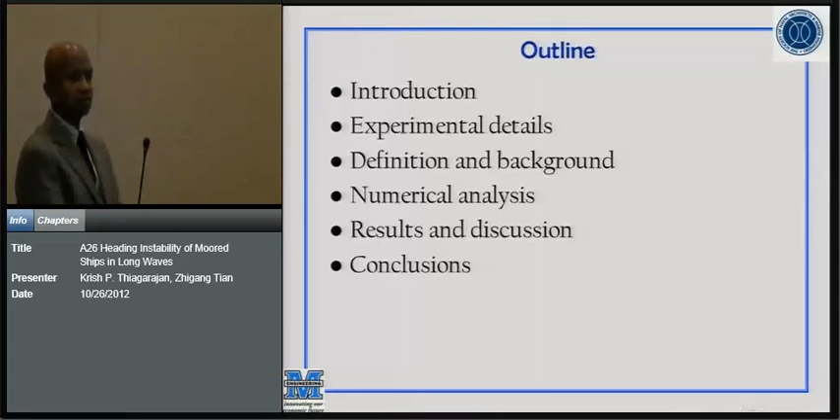To give you a background, in the offshore oil and gas industry, a lot of moored tankers are used for oil production because of their ability to store oil. They are used quite prolifically in remote fields such as offshore Australia and in West Africa. There are a number of regions where such moored tankers are the preferred production choice.

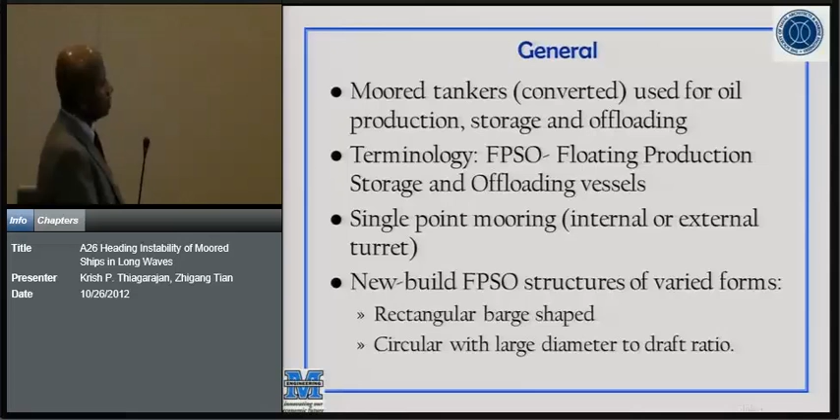To give you an idea of how these external and internal turrets look, what you see are two FPSOs. This is the Laminaria FPSO, offshore Western Australia, and the Kikeh is offshore Malaysia. The Kikeh FPSO has an external turret here, and the Laminaria has this internal turret here. The lower part of the turret is actually a turntable, and the upper part is fixed to the hull. Through the turntable, the risers which carry the oil go through, and they are connected to the connections on top through universal joints.

The mooring lines are also connected to fairlead points on the turntable. So the idea is, when there is a change of environment, the entire hull would rotate about the turntable, so the risers and moorings are not affected by the rotation of the hull. These are large structures, and you can see some human beings there - they are quite massive structures.

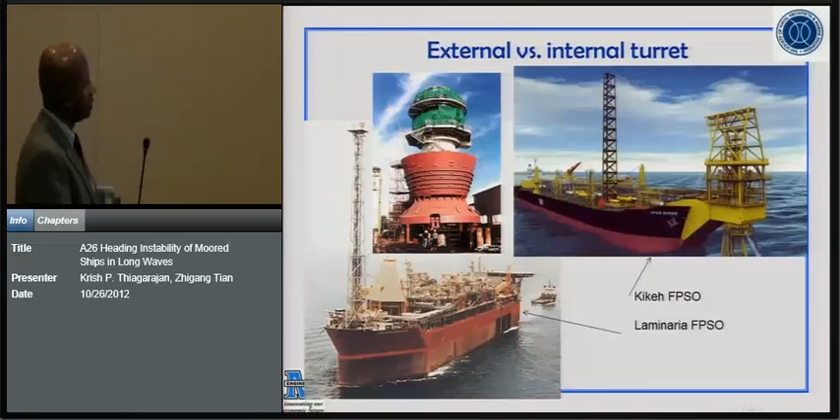To give you an idea of what actually happens inside the water, this is quite a clear picture showing how some of these lines are connected. You can see the mooring lines are these catenary lines in groups of 3 or 4, and then these lazy shapes here are the flexible risers. They carry the oil and other condensate into the hull for processing, and they all go through the turret system inside the turret. In this picture, you can also see a hull, a tanker, which is an offloading tanker - there is a hose that goes from the FPSO to the tanker for offloading the oil that's stored.

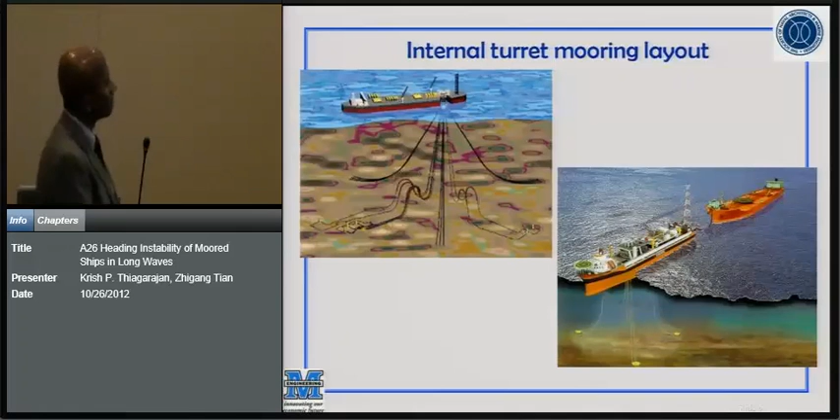So what is the industry practice? The principle behind the FPSO and the way the internal turret is located is that the FPSO will weather vane into the dominant load direction for directional stability.

But industry practice has found that the weather vaning ability is almost seasonal. It changes over the course of a year depending on which direction the waves and swells come from. Quite often they find there is loss of directional control when you have swells from a certain direction and seas from a different direction. In fact, there are cases where FPSOs need extra tug support to hold them in place for certain times of the year.

The problem with loss of directional ability is that you end up with large roll motions because the FPSO would take waves beam on, resulting in process operations being affected - like certain separation modules will simply not function when the roll acceleration exceeds a certain value.

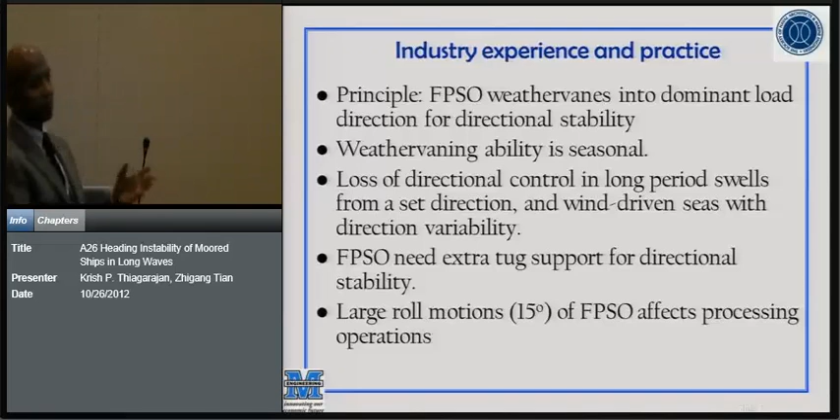So when we approached this problem, we were actually interested in examining the global performance of an FPSO in directional sea states. We said we'll start by doing some experiments and then move on to numerical modeling. In our experiments, our ultimate goal is to study bidirectional sea states - swell and seas coming from different directions.

We went to the ocean basin in St. John's, Newfoundland, which has wave makers on two sides. Quite a very nice facility.

There was an agreement between the National Research Council and the University of Western Australia, which allowed us to perform experiments over there.

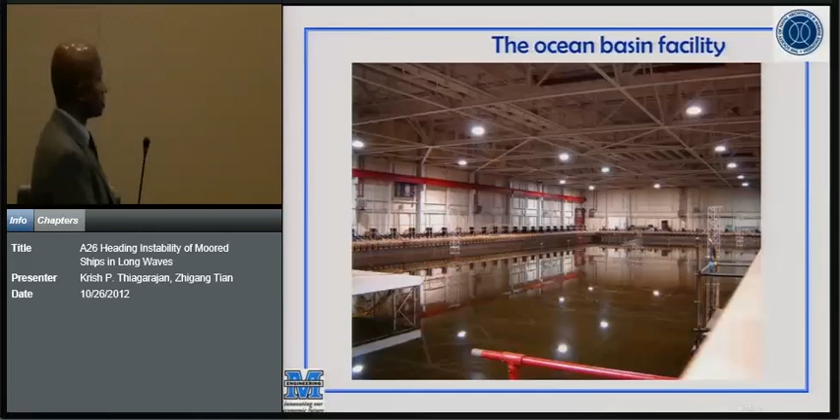The usable length of the facility is a little over 50 meters, and the width is about half of that, around 26 meters. The working water depth is about 3.5 meters, which is what we used. It has wave making capabilities from two different directions, which allowed us to generate swell and seas from different directions.

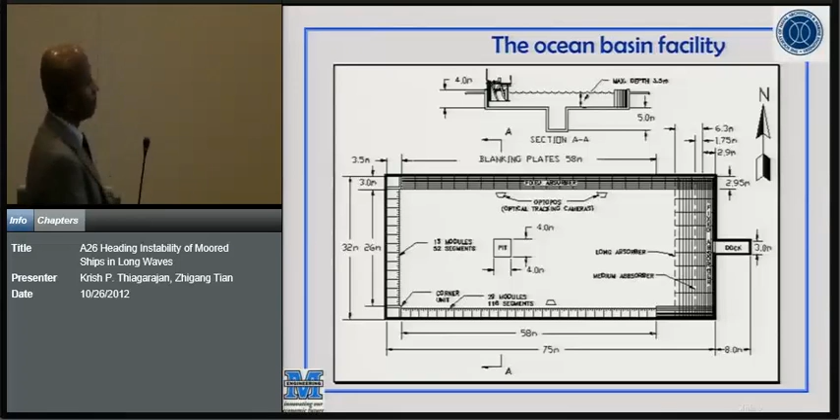The model we used was a VLCC with an overall length of close to 330 meters. The LPP is 318, the width is 56, and the working draft was about 10 meters, a little over the ballast draft. So we were working with a displacement of close to 150,000 tons.

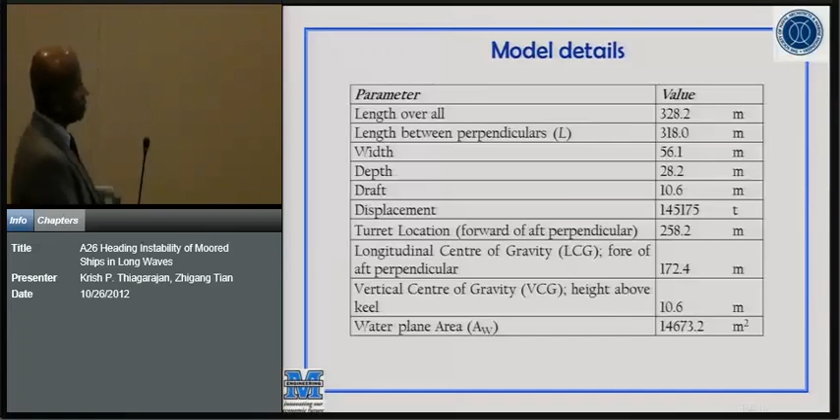This is a 1:60 scale model, which we used in our experiment. It's pretty close to the ballast, the lightship draft is what we used. You can see the hull floating over there.

They took a perfectly good model of a VLCC and drilled a hole in the front, much to the agony of some of the naval architects there, and put a turret with a little turntable there.

The turntable had 4 fair lead points, as you can see here, with 4 mooring lines attached, also instrumented with load cells. These mooring lines were basically fishing wires with soft springs attached to them.

Since we did not have a target mooring condition to work with, we tried to match some of the natural periods within a certain range, so we had a lot of flexibility in designing our system.

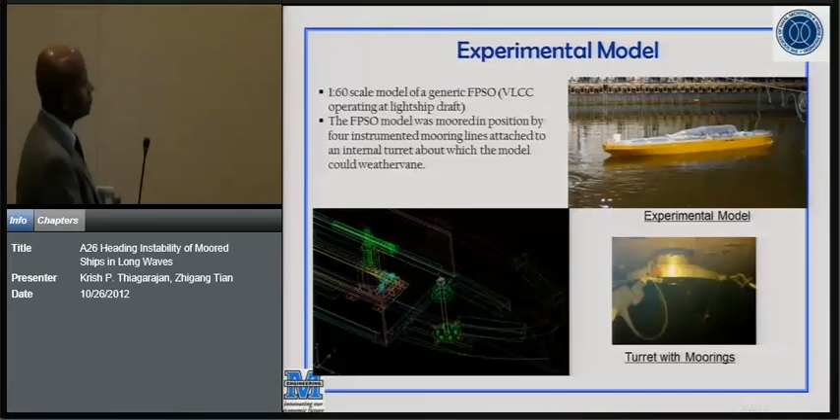That gives you a picture of the layout. So we got the hull with the mooring lines. There are 4 mooring lines, symmetrically laid out, and they were all individually tested, with their stiffness measured to make sure they were symmetric and close to each other. You can also see a vertical view of that.

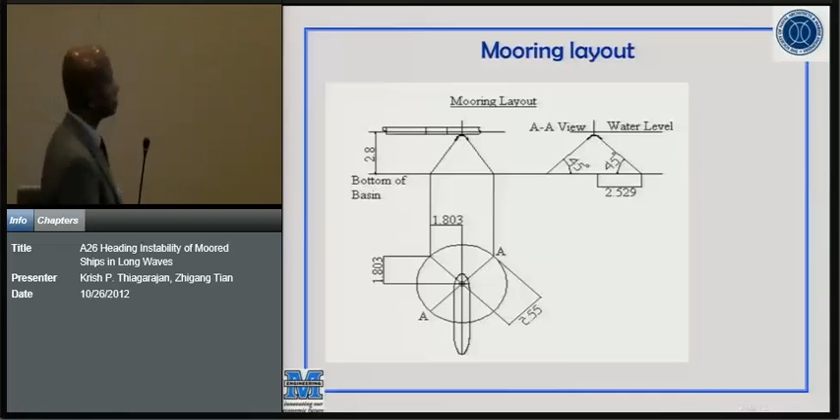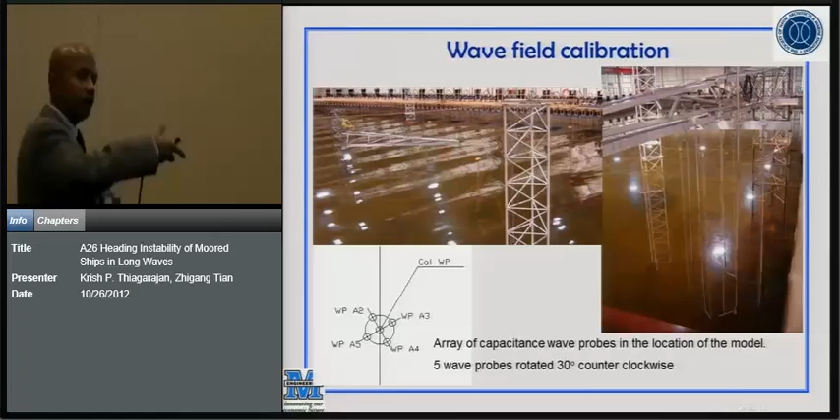Prior to the experiment, we calibrated the wave system with a multiple array of probes. Since we were interested in a bidirectional sea state, we had an array slightly rotated so we could measure the waves coming from different directions, for later use.

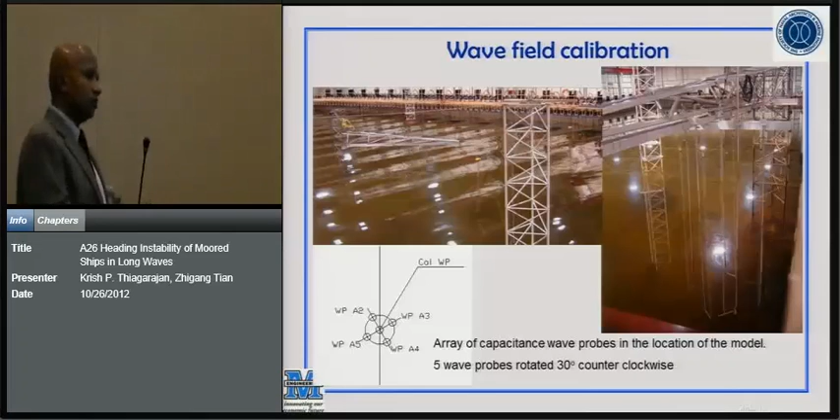But prior to doing the random wave measurements, we wanted to get RAOs of the hull, so we did a number of regular wave tests using the ITTC recommended wave heights and periods, maintaining a constant wave steepness.

We started with the model with just the mooring lines and did some short duration runs. We found an instability, and later tried to restrain the model with a soft line, which I'll talk more about when you see the video. We also did some long duration runs to see if the instability would go away later on.

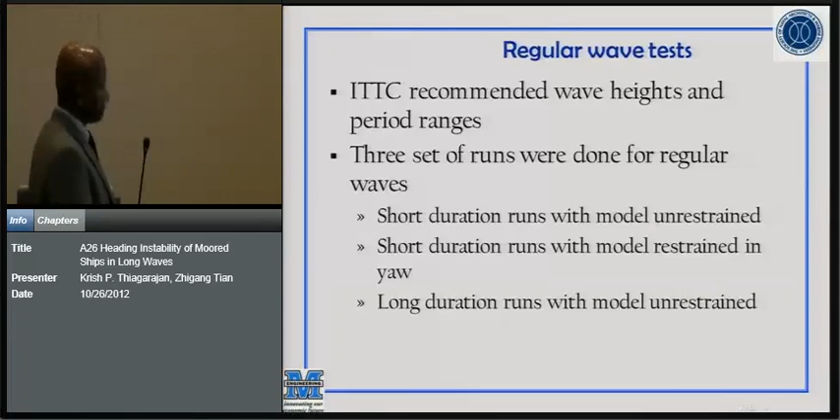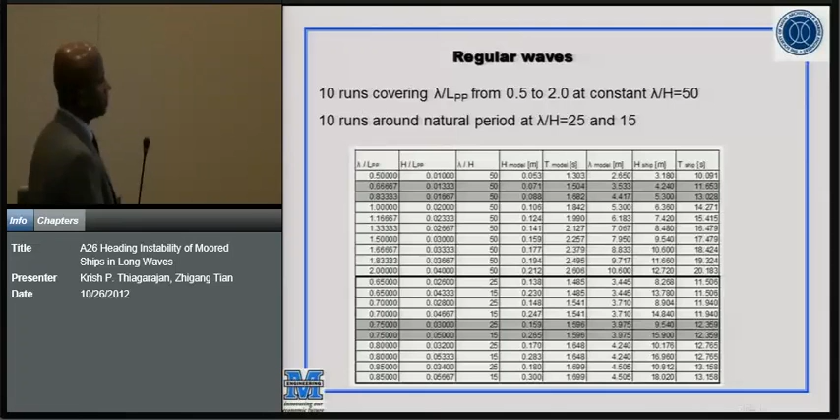We did a number of runs for a fixed wave steepness, and also covered a few ranges around the natural periods. Our main focus today is on these runs where the wave steepness is kept constant. Let's look at one of these runs.

This is for a prototype wave period of about 15.4 seconds. So you can see what happens.

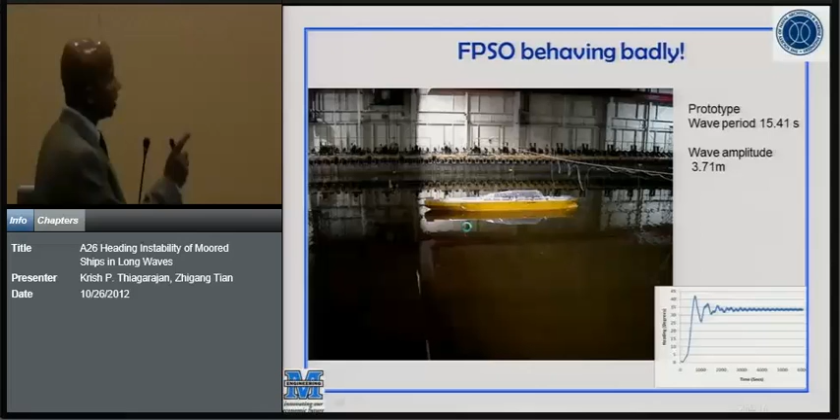This will take a few minutes. The FPSO is facing into the waves, and the waves are coming from right to left. These are very long period regular waves, not a random sea state, just a single monochromatic wave coming from right to left, hitting the FPSO. There's only moorings there, no restraint of any other type.

You can see what's happening. People get excited and saying that was my postdoc who was there.

The hull actually drifts away from the head sea condition and begins to take the waves beam on. Interestingly, it doesn't come back, it just stays there. And that's what we were more curious about: why doesn't it come back? Why is it staying right there?

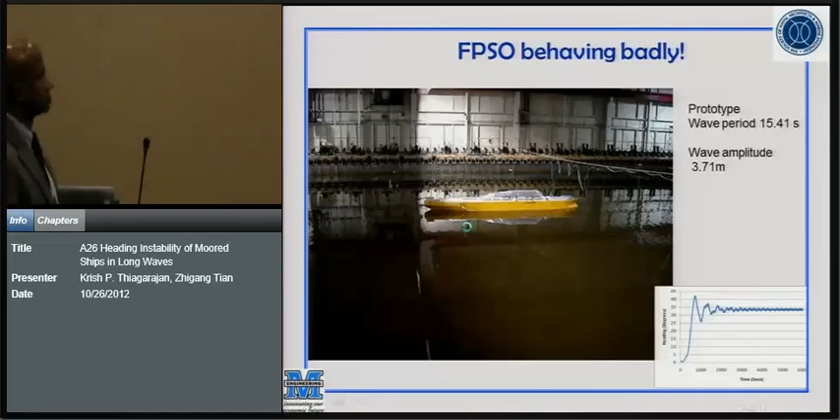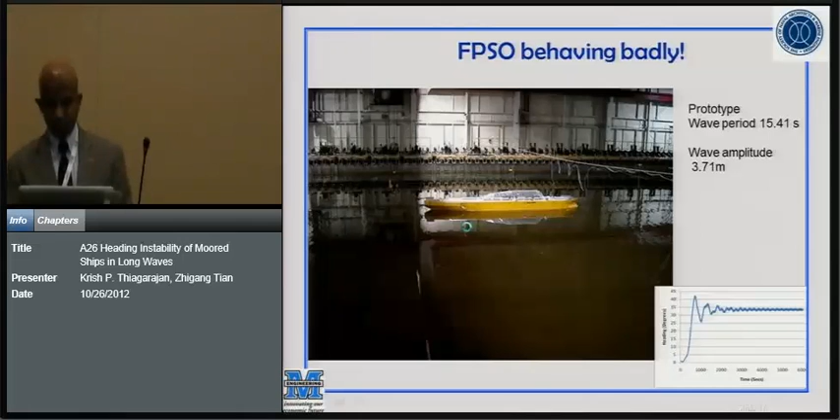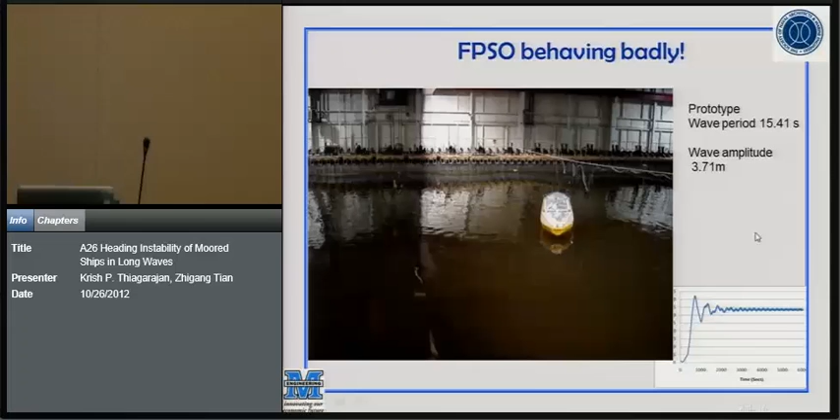So that little time series you see there is what actually happens to the heading. It initially is at a 0 angle, then it starts going up, oscillates a little bit, and then stabilizes at some very large angle, close to 50 or 60 degrees. This makes RAO evaluation very difficult when the angle is changing constantly, and RAO is a function of angle between the waves and the hull.

So really, how can you get an RAO? We were stumped. So we put some restraint in the stern, just a single line, a very soft line. We held it from yawing so much, so we can get a reasonable estimate of the RAO.

And also, we then did a very long run. Well, this is actually one of the long runs. When we did the short run and found this, we also did a long run to see what happens, whether the vessel will come back. We were hoping for that, but that didn't happen.

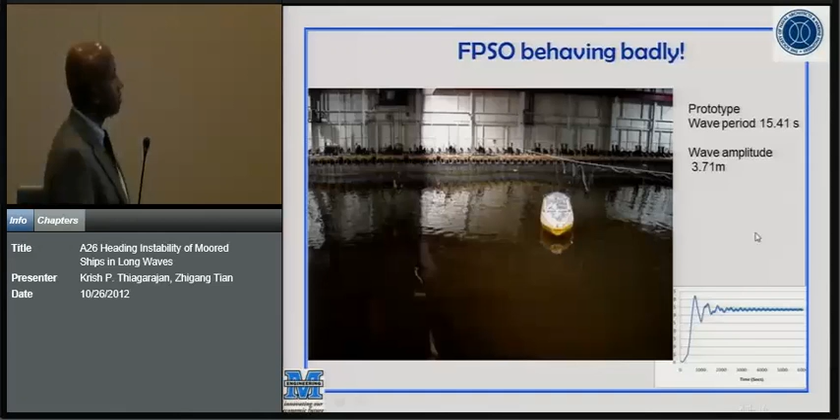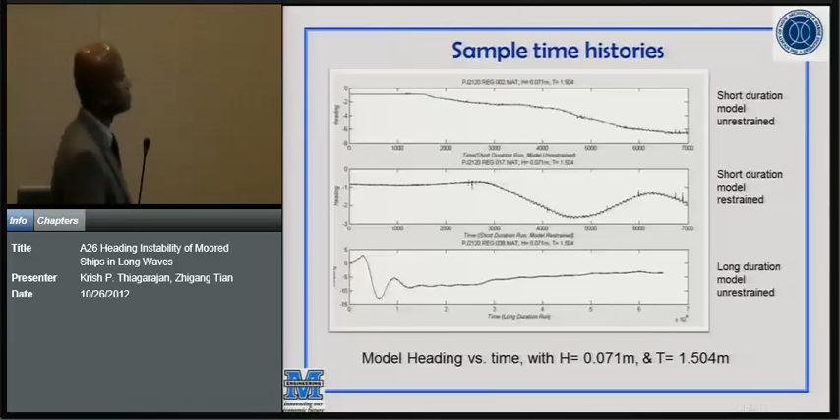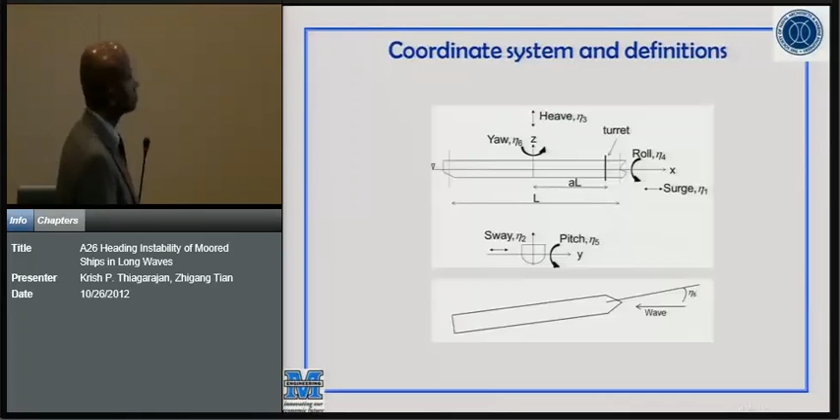So the wave-induced response of moored structures - commonly we think about the linear response, which is at the wave frequency, but we also have a number of nonlinear responses, the slow drift being the main one, comprising the mean and low frequency components. The high frequency response, also a nonlinear effect, is more important for structures like the tension-leg platform. But it's the mean response which we are very interested in here, and they affect principally the surge, sway, and yaw modes of motion.

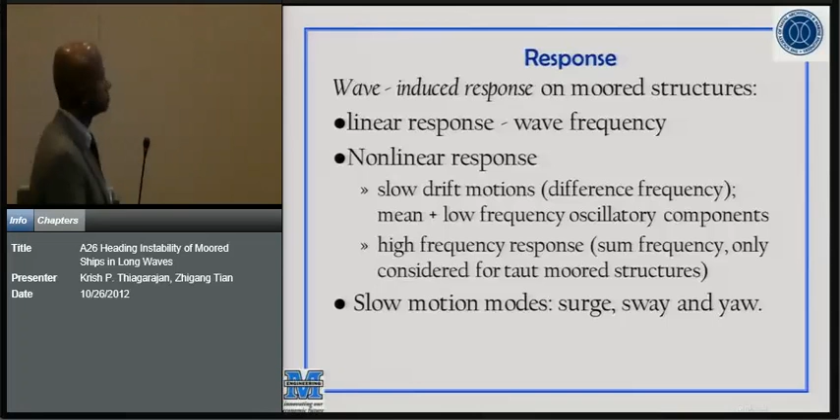So to give you an idea of how these mean forces come about, if you look at the kinetic energy, even with a single monochromatic wave, the kinetic energy has a mean term which is independent of time. And that then translates into a mean pressure and then a mean force. So this is a nonlinear effect coming from a single monochromatic wave.

Another contribution comes from a wetted area change. When you have pressure times area, which gives you the force, you could also have another nonlinear mean force contribution from it. So it's well established that mean forces arise out of regular monochromatic waves.

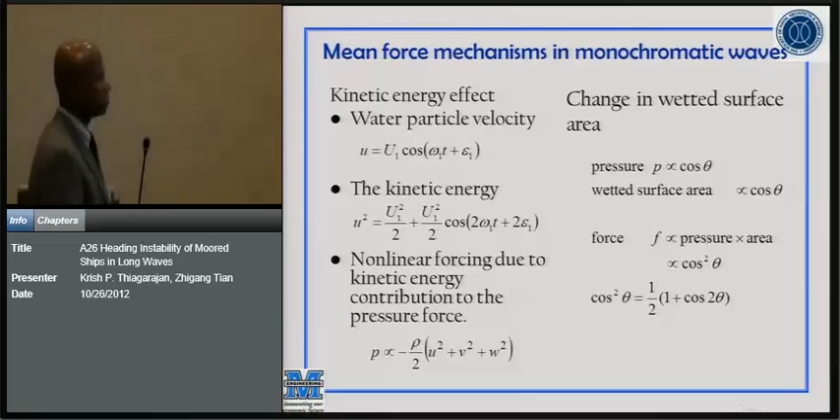What happens when you have a moored structure in waves? This is a very interesting paper published in Applied Ocean Research a few years back, where the authors talk about the yaw equation of motion and how it can be decoupled under certain conditions from sway and others. They show the equation of motion, which comprises the inertia term multiplying the yaw acceleration, and on the right hand side are the exciting forces.

The inertia term has your usual yaw inertia, and it also has contributions from the sway-yaw coupling, the suffix 2 for sway and 6 for yaw. And also here is the added mass in sway and the moment of inertia due to the parallel axis type moment about the turret axis.

So on the right hand side, which is what I'm more interested in, are two moments. One is the drift moment, which is a mean moment from the waves in the yaw direction, which is M66. But then you also have the sway moment. The sway force induces a moment about the turret, which is M62.

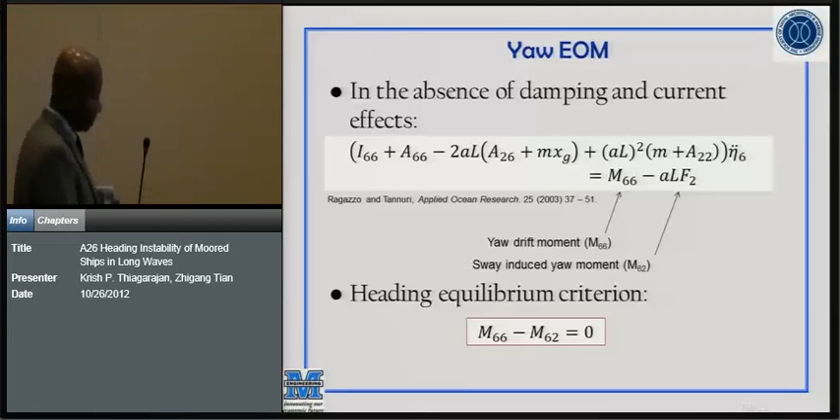So we feel that this is how it happens. Initially, the FPSO is in the head sea direction. Some sort of perturbation happens, as we saw when the guy screamed. Something happens, and then it starts drifting. We found in the experiments it drifts to the right or to the left of the wave direction. It didn't matter. So it drifts one way or the other.

And as it's drifting, these two forces are actually changing because they are functions of angle. They keep changing until there comes a point where these two forces are equal. And so the FPSO kind of sits there. So that's kind of the background.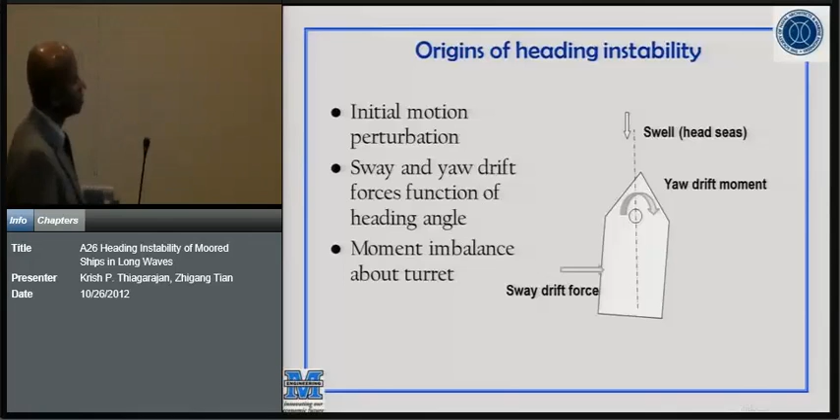So we set out to see if this really is the case, and we wanted to verify that through a couple of numerical approaches. We went to the frequency domain approach because that was more straightforward and faster. We call that the quasi-dynamic approach, where you can actually calculate the mean drift force from your boundary element approach in a fixed heading at different frequencies. It's a linear method, amplitude independent.

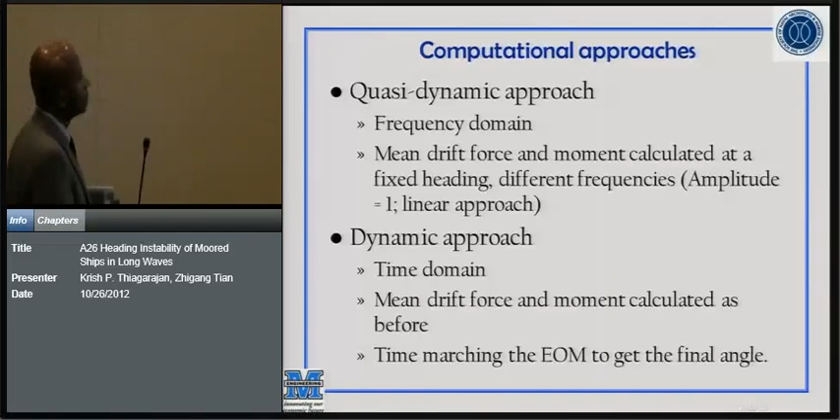In the dynamic approach, which is a time domain approach, the mean drift force and moment are calculated, and then we use a time marching to get to the final angle. So in the approach - I shouldn't call it quasi-static, it's quasi-dynamic.

It's a boundary element method approach, which we use the WAMIT program, which is part of the SESAM package from DNV. So you basically discretize the hull, and then you have monochromatic waves hitting the hull. You find the pressure due to various contributions, and then you integrate the pressure, the so-called near field solution, to get the mean force on the hull.

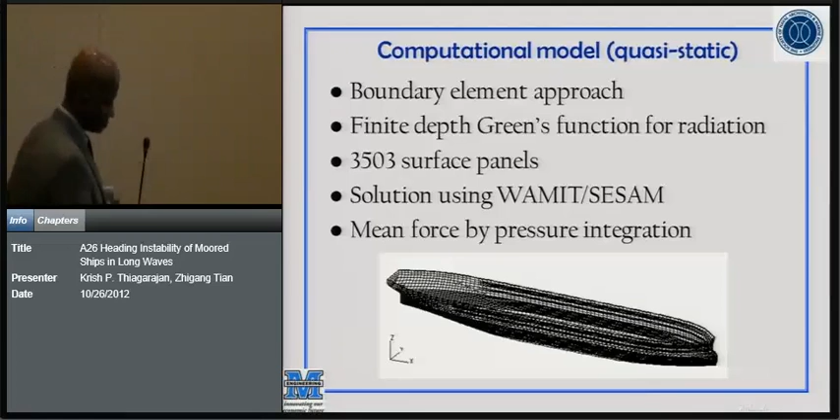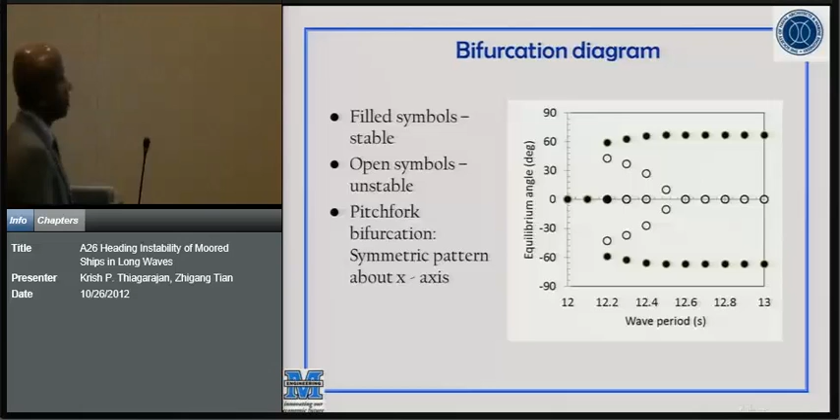So that was very interesting to find. We then went to dynamic analysis to see if we can see anything there.

So we used the software AQWA, which has some very good time domain capabilities. It's a 6 degrees of freedom time stepping routine. We can actually introduce mooring lines here. So we mimicked the same mooring system as we had in the experiment, and then we conducted our simulations here.

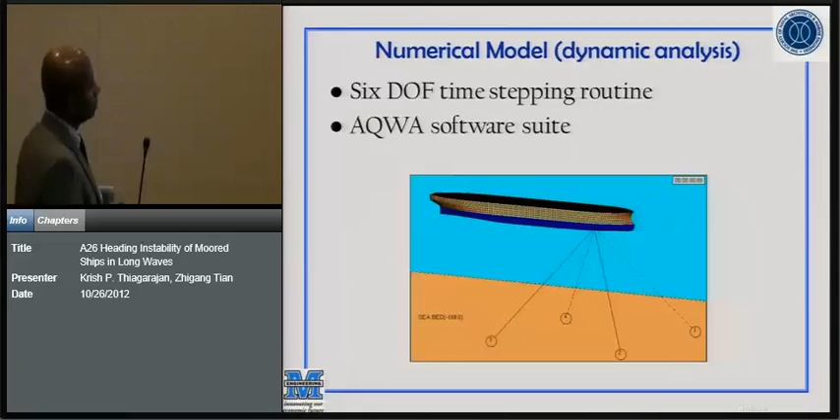So in the time domain, we have to first do a frequency domain analysis, collect some of the coefficients, the hydrodynamic coefficients, and then we input that. Then the 6 degrees of freedom equation of motion is formulated with the wave exciting forces, mooring forces, and any other force we may have, and then a convolution method is adopted for converting the coefficients from frequency domain to time domain, which incorporates the so-called memory effect. And then a time stepping routine is performed to get the position and velocity from the acceleration.

In our simulations, we used a time step of about 0.25 seconds. So we tried to get about 40 to 50 time steps per wave period. And we did a number of convergence tests and so on prior to conducting the simulations.

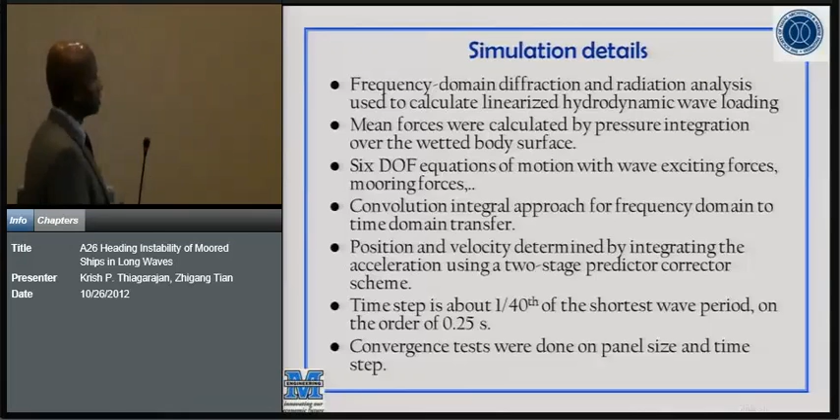Let's look at the results and see what we can make out of it. Both these simulations, the frequency domain and the time domain, demonstrated that there is a heading instability, and it's strongly dependent on the wavelength to ship length ratio.

The zero heading is stable until the ratio is about 0.6, and then there is the onset of the heading instability. The heading angle increases to about 50 to 70 degrees, for a range of wavelengths ranging from 0.6 to 1.8 times the ship length.

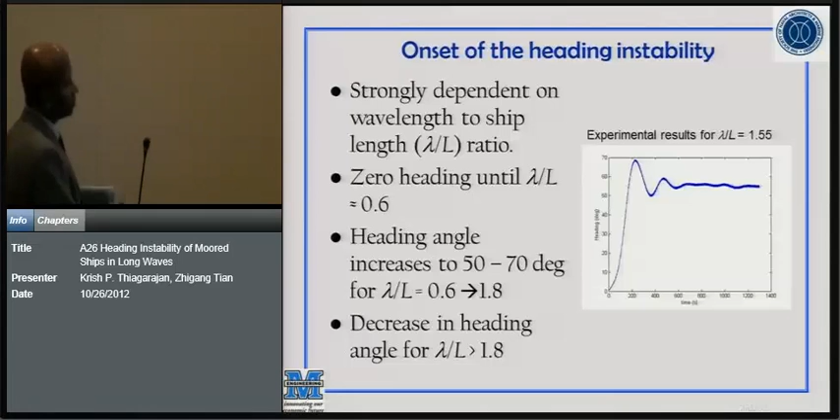What we see is a characteristic signature like what I've shown here. This is an experimental result. Initially the zero angle, the vessel starts drifting, moves into a very high angle, and then it oscillates about that angle. So there is an initial overshoot which is then compensated, and the vessel kind of stabilizes at some large angle. This is something we saw quite consistently in a number of cases.

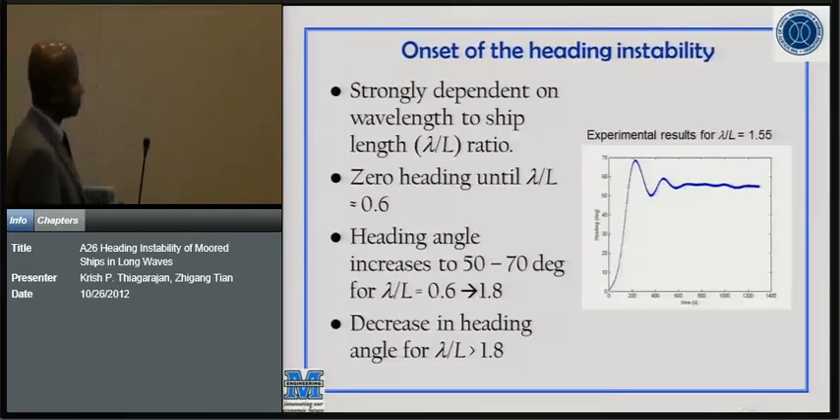So this is the main figure from my paper. I'll spend a few minutes talking about it. This one shows the equilibrium angle versus the wavelength to ship length ratio.

I've shown here experimental data, results from the frequency domain, which is the dashed line, and the time domain, which is the solid line. In experiments, we saw the vessel drifting both to the left and to the right of the head sea condition, so we have just looked only at the magnitude. We haven't taken the positive and negative signs; we have put them together.

So what we find in this case is the zero heading is preserved up until a certain wavelength, and then almost all three of them show the onset of instability at about the same point. They show that from zero, the vessel goes unstable to about 70 degrees, and then it kind of remains in that general region up until about a ratio of 1.8, and then there is some kind of a dip which is also shown in the experiments and the time domain.

The solid symbols are actually experimental data, but the open symbols correspond to the overshoot we saw in the experiments, which I showed in the previous slide.

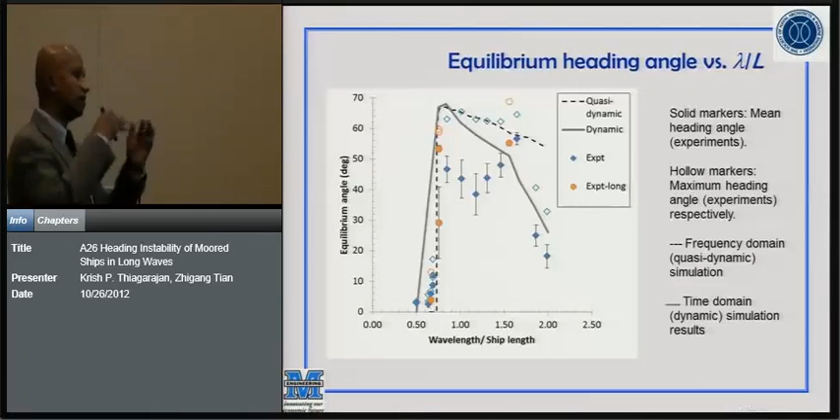In the experiments we also did some long duration runs, which are shown in orange, and the short duration runs are shown in blue. The short duration runs have one standard deviation error bar there, which denotes the fact that we could not always get converged results because of the short duration.

But overall, we see a reasonable agreement between the numerics and the experiments, and actually the agreement is pretty good with the quasi-dynamic, that is the frequency domain, and the overshoot, the maximum angle we saw in the experiment. So that was pretty good. The time domain shows slightly lower angles than that, but it's well within the experimental data, and it also shows the decrease, which is well captured by the time domain and the experimental data. So there is a lot of interesting things we saw from the simulation in comparison with the experiments.

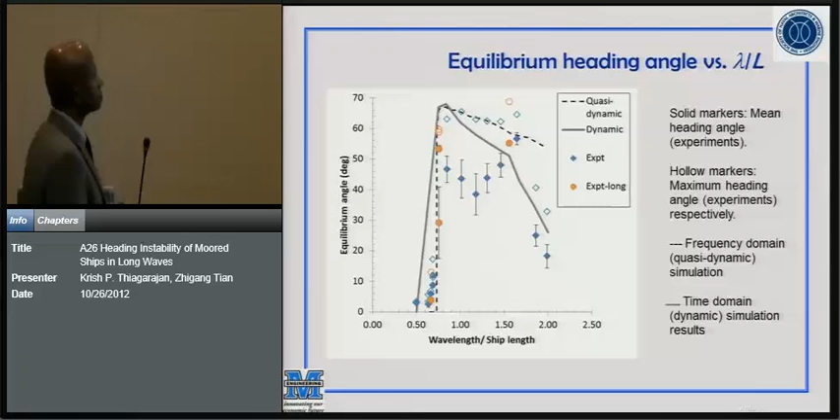Contrary to what we expected, the simulation and the agreement kind of opened up a whole new list of questions. One of them was the effect of damping. The simulated results did not include viscous damping. The inviscid part, which is the wave radiation part, is naturally included in the time domain simulations, but we did not include any viscous damping. And the effect of viscous damping is what we are studying right now.

We found that when you include viscous damping in sway and yaw, the final heading angle is preserved. But when we introduce it in other modes, in heave, roll, and pitch, you can actually alter the final heading angle. So we are still trying to understand what all this means, whether it's a program-related, software-related issue, or is it something physically real.

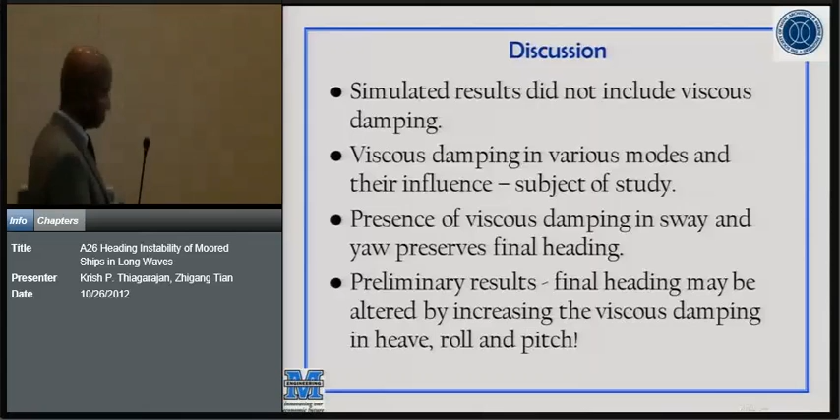So to conclude, we find that ship-shaped FPSOs are susceptible to weather vaning instabilities when the wavelengths start approaching the ship length. And we think that this might get worse in complex sea states when you've got swells from different directions from wind-driven seas, as well as winds and currents. So all those can complicate matters quite a bit.

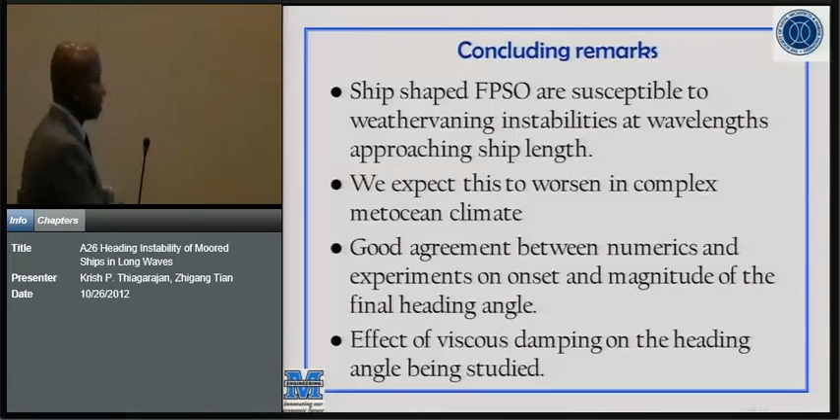Well, thank you, Professor. That was an interesting and timely paper in the offshore oil industry's interested FPSOs. And thank you.

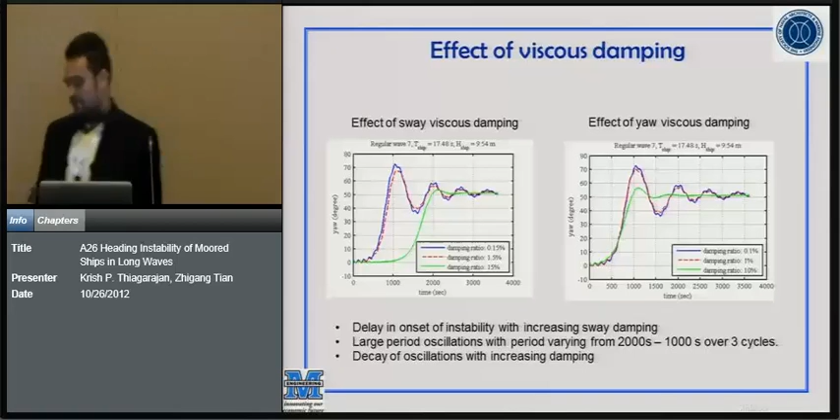So the authors would like to thank Dr. Bandig for his interest and the comments.

Since we have the figures here, the simulations we have shown, for a wave period of 17.5 seconds, the time scales of oscillation, including what you refer to as high frequency, still have a much bigger period than the wave period we are looking at. So to me, the large oscillations as well as the little wiggles you see there are all much longer time scale than the wave period.

So it's some nonlinear aspects which are coming into play, and we are fortunate that it didn't alter our discussion, because the final heading angle is unaltered.

However, we take your point that, in fact, the comments you provided about the inviscid damping are very insightful to us, and it will help us with looking at how we can go forward with our analysis of the effect of damping. In fact, we find the effect of damping is critical to the magnitude of oscillations, as you see here, and the effect of viscous damping on the mean heading is also important, which we want to investigate further.

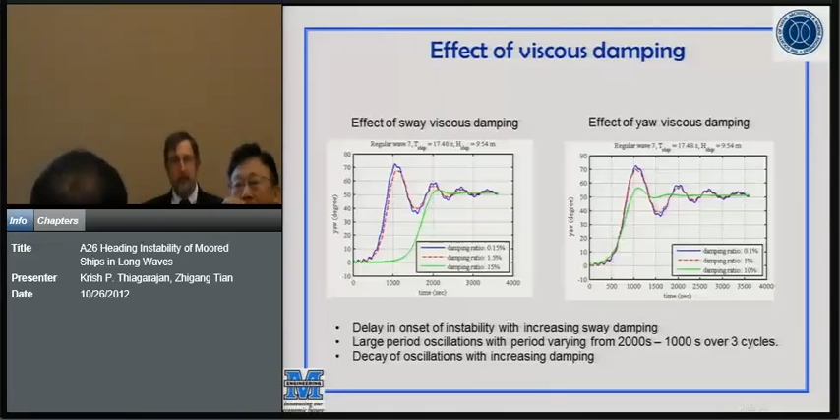First, I'll mention a comment about ship hull in support of the very, very good paper. Most permanent FPSO mooring designers would agree ship-shape hull forms with L/B 5 to 6 are not optimal, but they are readily available, and the places to build them have dry docks that fit that configuration. So except for circular hulls, I don't see a big change in the near term.

Secondly, if you superimpose wind and current, which are at different angles than the long period swells, the final yaw angle is generally much less than 60 degrees, on the order of 25 or 30. And the solution to the roll problem is deep bilge keels on the order of 1 to 1.5 meters, which increases the roll damping.

There is an API code for mooring design, and I believe it gives guidance as to the design spreading between wind, wave, and current that you should use for the design. And it's true, the design generally focuses on the 100-year event, survivability in a 100-year event.

And these large amplitude rolls occur in generally strange conditions: hurricane has passed, wind is light, and the seas are on the beam.

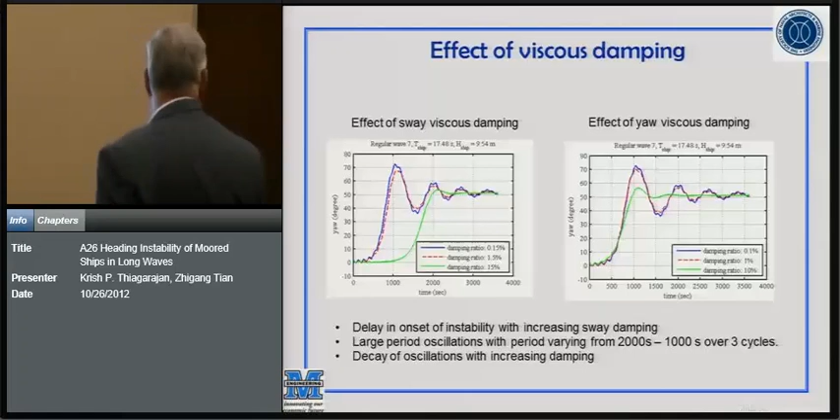And finally, there are many, many West Africa and Brazil mooring systems which are spread moored to align with the swell, and that helps get rid of that problem. Thank you very much for your paper.

It was very good. Thank you very much for a lot of those comments, and they are very coming from someone from the industry. That's very insightful.

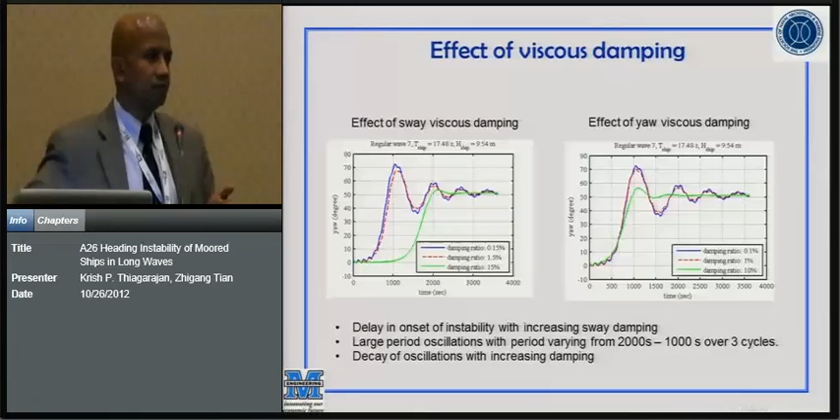While we were doing these experiments, we also had a chance to go to the Danish Hydraulic Institute, which is now called Force Technology. I was talking with people there. They had an FPSO which they were testing, and they found similar heading instability problems, and they echoed what you just said, that when you put wind on it, it stops the heading from drifting like that, and wind actually for once helps in stabilizing things.

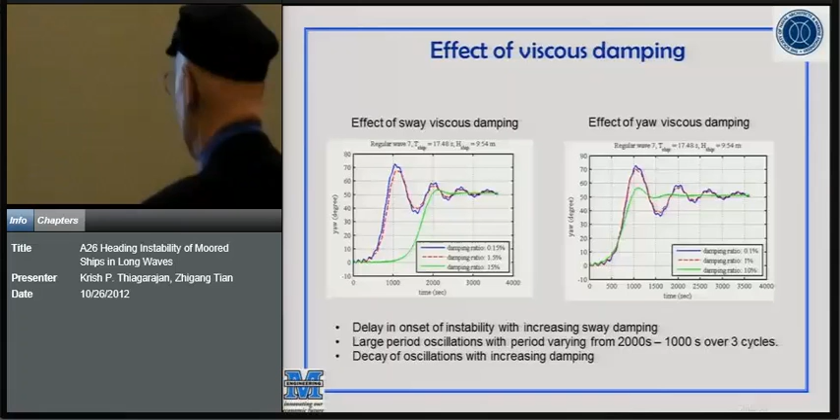Bruce Hutchison, Glosten Associates. First of all, as noted by both of the first written discussions, I don't think of this as an instability. I think of this as a stability. It's showing a stable behavior, so it's kind of a symmetry breaking stability. It breaks the symmetry of head into the seas, but it goes to a stable condition.

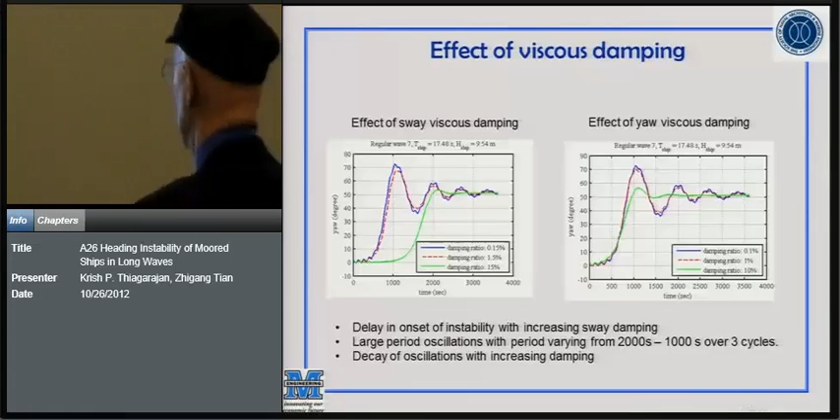I'm a little confused about the discussion of damping in that the damping doesn't seem to affect the mean stable angle, but it does seem to suppress those longer oscillations, which appear to be some sort of subharmonic resonance. So I would be probably looking for some difference frequency phenomena, maybe leading to those oscillations. I'm also a little confused about the definition of the damping ratio, since there's no obvious restoring force here. We don't have a critical damping, so I'm not sure what the percent damping is referred to. Maybe you can clarify that.

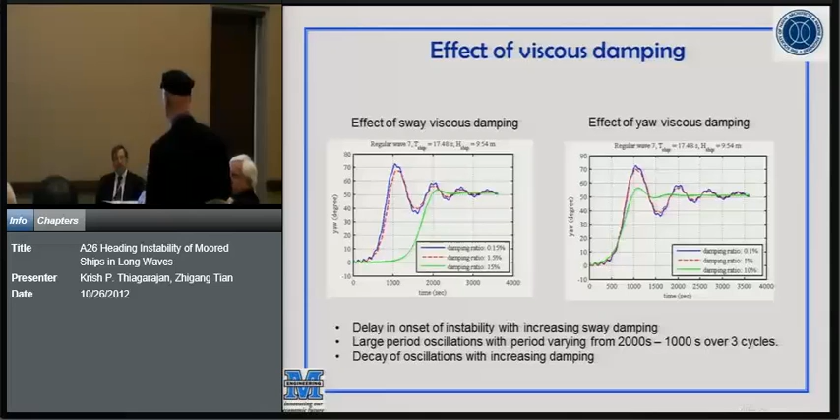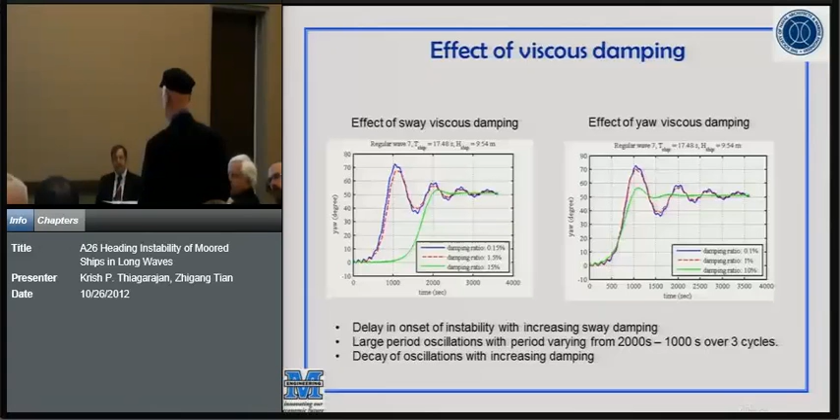Finally, I can't remember the exact citation, it's now probably quite an old JSR paper, but I believe there was a JSR paper about 20-some odd years ago on a mooring instability, single point mooring. It was about dodging, and it basically related it to a chaotic phenomena, so why boats will dodge at their mooring, and that had an explanation in chaos theory. Thank you.

Thank you very much for those comments, and we are equally puzzled about the effect of damping in some of the simulations here. But we can understand that the oscillations which are happening about a mean value, they get suppressed by damping, and that's kind of, to some extent, you can relate to that. I'm trying to look here as to how we define the damping ratio, and this was a question which one of the reviewers asked, and we addressed it in the paper. I just can't recall offhand. And your point is right, there is no natural frequency, so we had to use some estimate.

If there is a written opportunity for this, I'll certainly include that in it.

John Crosswhite, I'm also from the Glosten Associates. I actually had two questions.

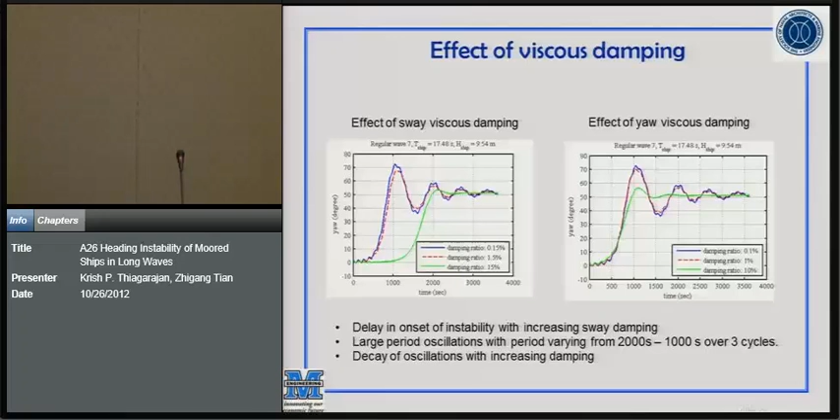I had two questions. One is, does the right-hand side, that delta, the delta between your M62 and your 66, presumably that changes with heading angle, yes? Yes, the actual magnitude of that. Negative. Now, if that provides an effective stiffness term, a yaw stiffness term, right, because your right-hand side is changing with angle. Yes. Do you, just for a point of reference, do you have the natural frequency, and you also have a moment of inertia about your turret, do you know offhand what the natural frequency of that system is related to this? And my second question is, have you thought about the variations in like a 4/6 term? Do any of these oscillations relate to 4/6 type mass terms and how the model was loaded, like a gyroscopic effect, perhaps? Just curious.

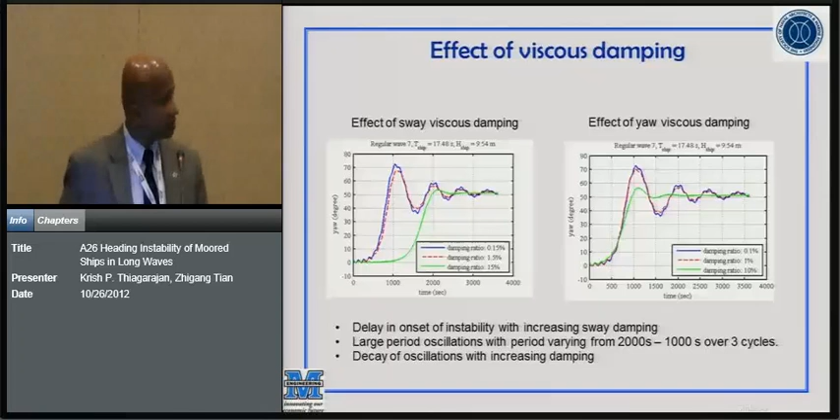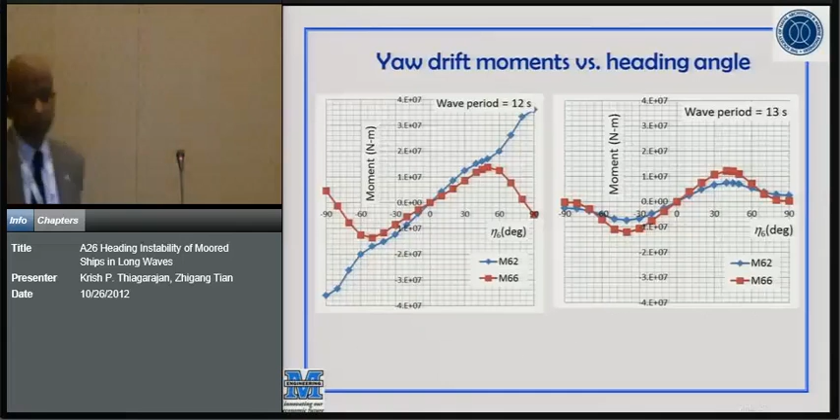Those are very good questions, thank you. I'll answer the last one first. We did look quite a bit at the cross terms in the mass matrix and the inertia matrix, and we found that their effect was quite negligible. We were actually hoping it wouldn't be, because that could explain some of that. The other point you made is very interesting, and that's something that would be worth investigating. I can possibly look at this picture here, and maybe use this. So in other words, we are looking at how much is the difference between these two forces right here, and how rapidly will it bring it back to equilibrium, and that is a stiffness effect. That could actually answer the oscillation effects. So I'll definitely investigate that and see.